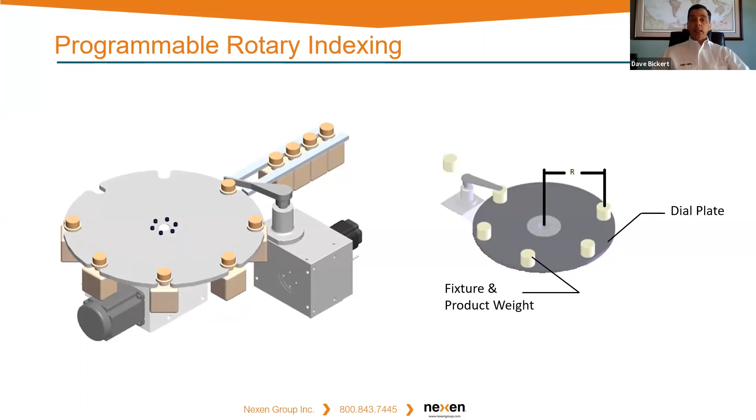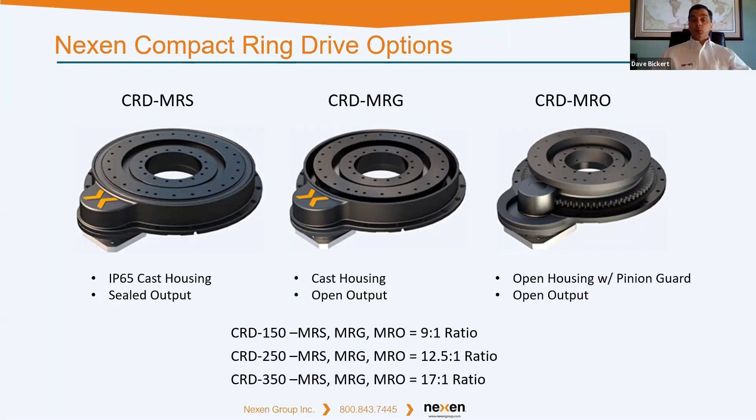That can be important because whenever we do put power to these systems, you're going to have the inertia reflected through the square of the ratio, or the torque reflected back to the motor. So we'll show you how that works.

So another thing that Nexen will offer, since we were talking about a typical dial plate option, we will take care of supplying the dial plate. And Nexen can do this, and we have pre-configured dial plates for all of the CRD products. Typically steel, aluminum, those are what we run into as far as material.

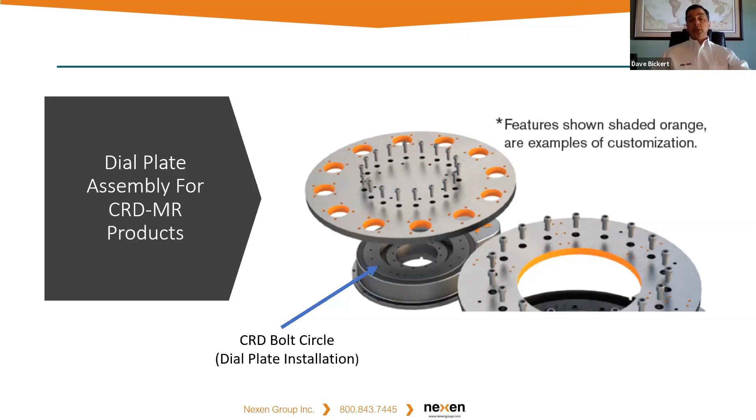And if you wanted it to be customized, it's possible that there could be some additional machining done at the particular stations. And that's typically done for fixtures. Customers, whenever they're going to put their fixturing, they will require some additional machining. So that's a possibility if we need that done, but a lot of times customers will take care of that.

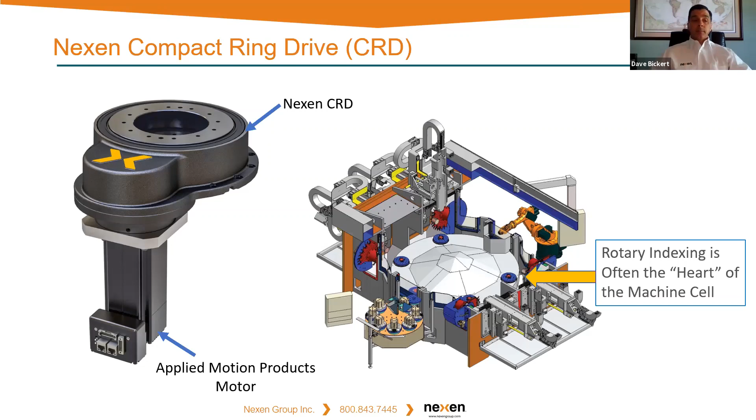And that's what we're looking at here. Okay. So that does allow for a very accurate automation. And part of that is the unique Nexen feature, which is the roller pinion technology. So the design of the roller pinion, this feature is really what is utilized in every compact ring drive product from Nexen. The roller pinion, it utilizes needle bearings.

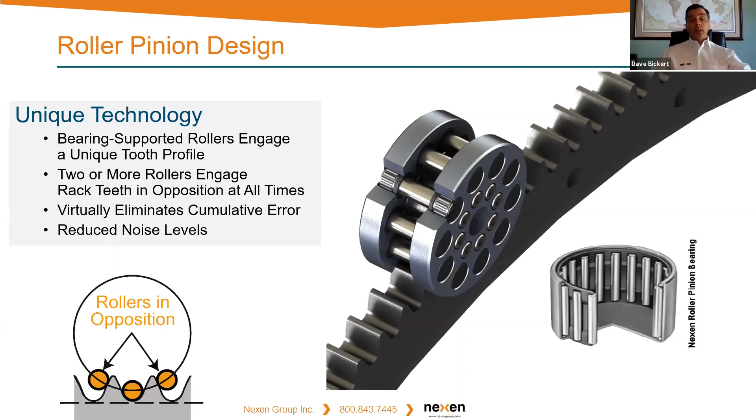And that's what makes this very unique technology, so that it is very accurate with zero backlash, and a very smooth rolling motion is what you're getting. So if we were to look at this, just give you an idea, when you see the pinion with the actual gear, you see a very smooth rolling motion. This allows for a very accurate system. It's low friction. We can take care of high speeds. And also what customers really like about this is it is very low maintenance. So you get a lot of nice features mechanically, but it is very low maintenance as well.

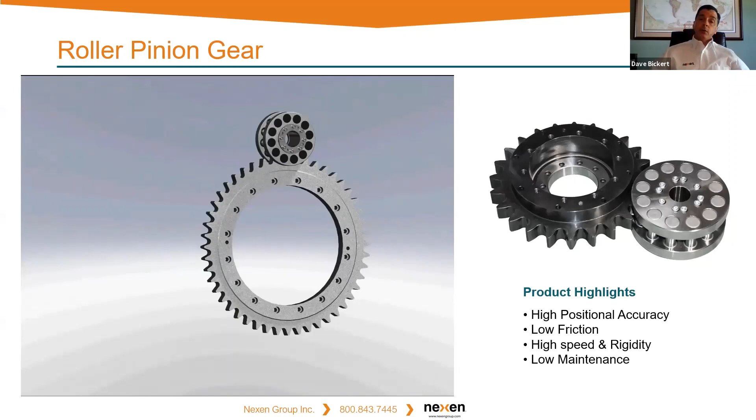And we're showing you a photo of a gear mated to a bearing with the pinion on the right. So that's what's inside of the product. When you look at the CRD product and you say, hey, what's inside this? Well, what we do is we take the superior roller pinion design, and then we incorporate a high quality cross roller bearing. So the high quality cross roller bearing, that's important. It does provide for stiffness. It's ideal for high load applications. So we make sure that this is inside of every single CRD product.

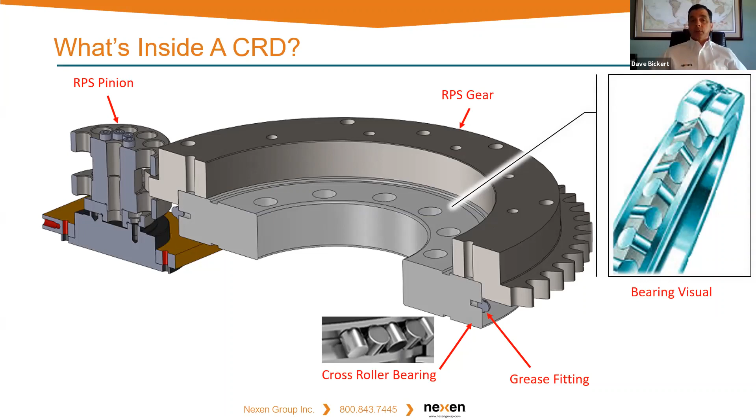The cross roller bearing is really nice for axial, radial, and moment load demands. If you're not familiar with a cross roller bearing, I've kind of highlighted down below the rollers and how this works. And then on the right as well, you can kind of see that. So these would be referred to as the components that go inside of the casting of the CRD product from Nexen.

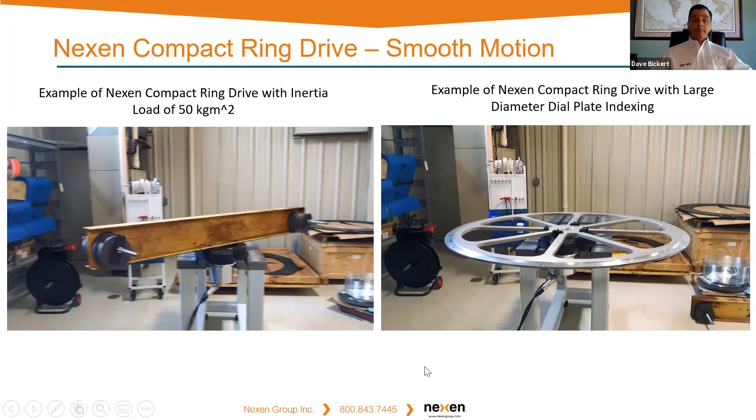So if we were to take a look at some examples here, let me just go ahead and play this. This is actually a very high inertia load on a small CRD 250 product from Nexen. And for that particular visual with a very high inertia load, that is a very smooth motion that we're getting out of a very small unit. This is really showing the real unique feature of the roller pinion technology. And on the right, that's a very large index dial plate. And that dial plate is being indexed programmably. Angular displacement is programmable. Okay? So smooth motion is what I'm demonstrating in those videos.

A typical dial plate rotary indexing application from Nexen. What we're going to do is we're going to look at a freely programmable need, and we're going to look at the displacement. We're going to look at the motion profile. A typical triangular motion profile is shown in this visual. On the left, you're seeing where the actual Nexen CRD product is, the dial plate on top of it. There's stations that you have where you're putting weight and fixtures. And we're going to take care of the application requirements and do some calculations for you.

Typically, it's index displacement, index time, the dial plate inertia, the fixture and part weight inertia, and then also accuracy and repeatability come into play, because whenever you're actually indexing from station to station, the customers are very much in demand for accuracy. And so this is important to us. What you're seeing is some different ways of calculating inertia for the dial plate, calculating inertia for the weight at the radius. But the idea is that we will analyze the system and make a recommendation for a complete solution. We're very much dedicated to the engineering focus on this. And so any help will actually provide that.

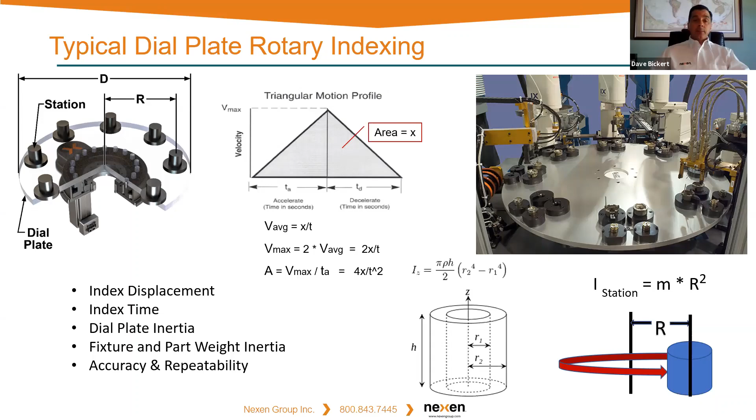Okay. A nice feature for the CRD product, and this is available on all of the castings that are part of the CRD. It includes a stationary center support, and the stationary center support can be used for bolting a post or some type of fixture.

In this example, what you're seeing on top in gray is an upper tooling plate. And in this example, you're seeing some pick and place products that are actually installed on the upper stationary tooling plate. So the casting of the CRD allows for this. You can actually have the rotary dial plate, and then on top is a stationary plate that's bolted to the casting of the actual CRD.

And you can install, like in this example, rotary pick and place units, which would be linear. And you still have an access hole through the center. So if you need to run any type of cables, we can take care of that through the access hole that's in the casting in the center of the product. So that's a visual for you just to see how that works.

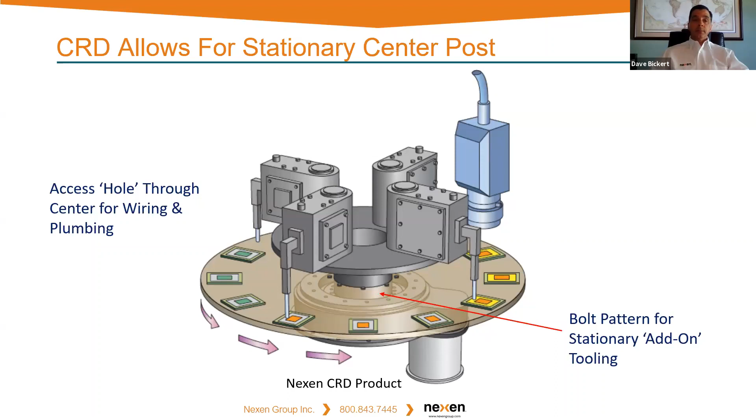All right. So when you talk about accuracy and repeatability, I've mentioned it a few times with regard to this unique feature of the roller pinion technology in the CRD product. Accuracy and repeatability is important, especially whenever you're taking care of an index move. So the zero backlash roller pinion and gear design of the CRD does result in high accuracy, high repeatability, and that's important at the actual fixture and part station, so at the radius.

So in the example, if we take a look at the upper right corner, you're going to see a visual of an indexing dial plate. And on that indexing dial plate, you can see that there's some individual green wafers. They're labeled at the stations as A, B, and C. If you were to look at these wafers in a plan view, in the center of the screen, looking down on top, we can take a closer look and give you an idea of what high repeatability and high accuracy is.

So what we're trying to do is locate the yellow circles into a very repeatable and accurate location on those wafers. And so if we look at the first one, you will see that those yellow circles are scattered and they are not hitting the center of the target at all. So you would not have very good accuracy or repeatability in this case. It is very scattered.

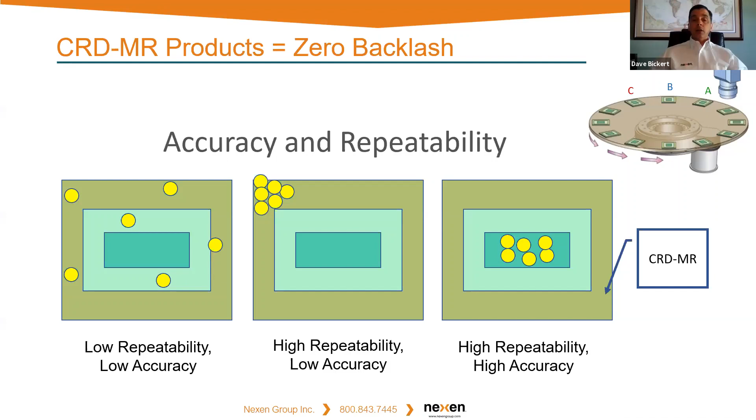So what Nexen's CRD product enables you to do is it gives you that high repeatability and high accuracy, where you see all of the yellow circles have made their way into the center of the target on the wafer. Okay.

So that takes us to the power source of the mechanical indexer. The CRD product line, the MR series, is designed so that you can install a motor or perhaps a gearhead and a motor to the actual product. So we have the input, and the input is a motor adapter. If we look at the visual on the left of the CRD, you'll see that we have a square aluminum motor adapter underneath the X at the bottom. And that motor adapter is configured for the actual application.

It's designed to allow for a very easy bolt-up of a gearhead or a motor. Now, that just depends on the application, and that's where we can assist you. I talked earlier about the ratios. Sometimes an additional ratio may be needed in order to get the reflected inertia back to the input to be a nice match for the actual motor. So sometimes a gearhead is needed, sometimes not. And that's where we'll help with assisting on the power source.

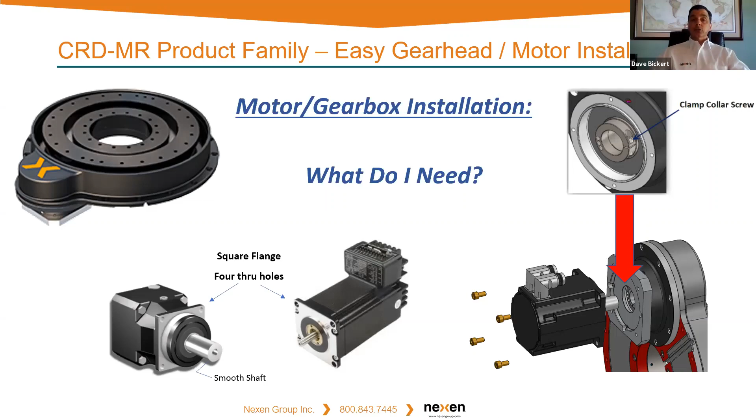And so that's important because now we're going to actually get into the power source of the actual CRD product line. So thank you very much for the time, and I'll go ahead and leave it to the questions now.